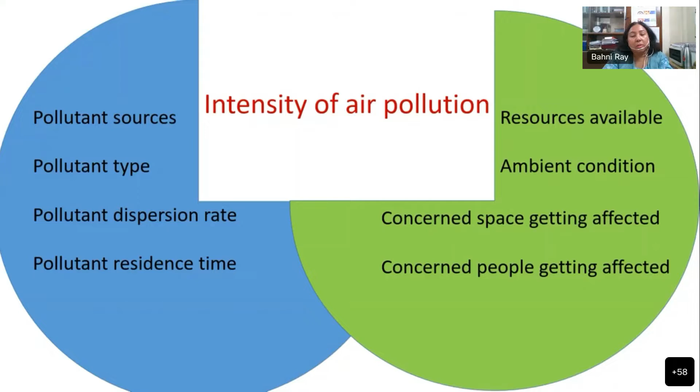If we look at the second circle, that's how we are tackling it. It could be the available resources, which I will show you today as a list. What is the ambient condition? Here atmospheric parameters come into picture—temperature, humidity, wind condition, location—all those things matter for that particular resource. What is the concerned space getting affected—is it a school area, inside a room, an office, or an open traffic space? And who are the concerned people? All these factors are noted when thinking about the mitigation technique.

Quickly I will go on to the sources, or again the enemies we are tackling. First we look into the gases. Most of them mainly consist of carbon monoxide or carbon dioxide, where the maximum part is from transportation or combustion of fuels. Then there are other factors like manufacturing, which I will not go into in detail in these slides.

Then there is NOx, where again the main contribution is from transportation. We have SO2, which comes from transportation as well as electricity and heat production. And we have volatile organic compounds, a combination of transportation, residential input, and oil and natural gas. So indoors, for example, we have a lot of sources where we get VOC as a pollutant.

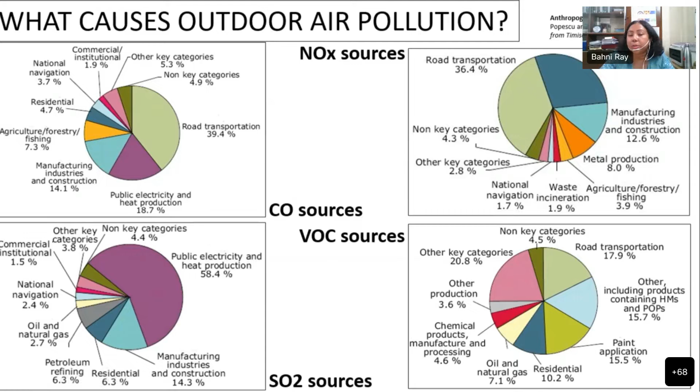And there is a new enemy now for us, which is HFC, the hydrofluorocarbons. This is the worst enemy, because it comes from refrigeration or air conditioning, without which we cannot live nowadays—so we cannot avoid having this. It accounts for about 47% of the entire chart.

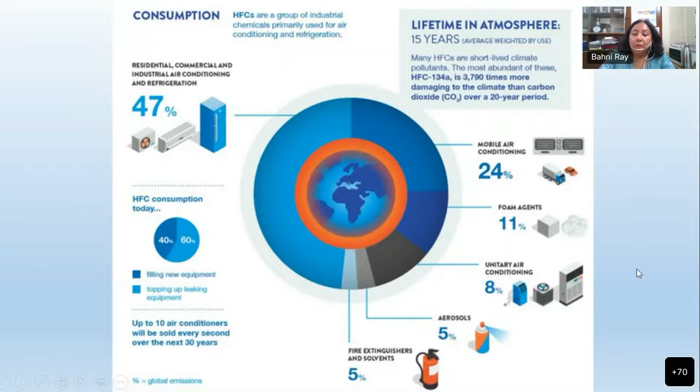Apart from this, we have particles, which we call PMs in short form. We may have seen this kind of chart before. Why did I keep it again here? It's because if you look into the sources, the green ones are from nature, which we cannot avoid, and the red are man-made. That's something to think of, that we are making the pollutants and now deciding how to remove them. That's a real concern for all researchers nowadays.

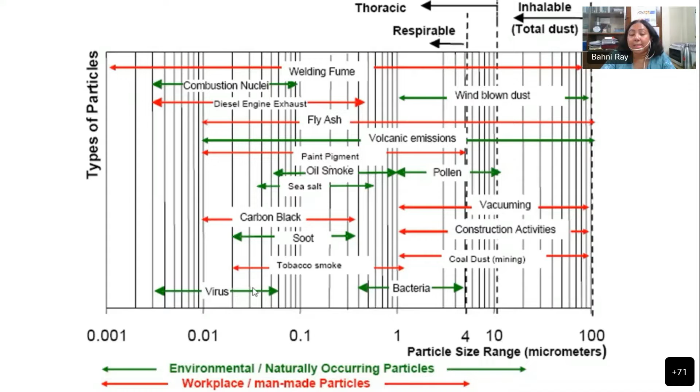When we talk about PM10, it actually consists of particles coming from fly ash, smoke, diesel engine exhaust, bacteria, virus, all those ranges.

Regarding the size, most papers compare it with human hair, which is about 50 to 70 microns, and we say we are looking into much, much less sizes, like PM10, which is around 7 times less than this, PM2.5 and PM0.1. PM0.1 is in the range of ultra-fine particles. They're called coarse, fine, and ultra-fine, depending on size.

I kept this spider silk or spider web here, which we could also see through our naked eyes. It's about 2.5 to 4 microns. That's the range we're looking into for fine particles, and lesser than that are the ultra-fine particles. So this is where we are getting this from.

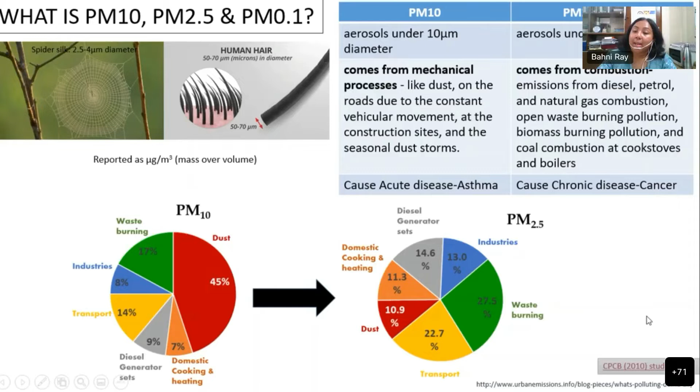PM10, the larger one, is mainly from dust, and some ranges are from waste burning or industries, and PM2.5 is mainly a byproduct of combustion. So that's the scenario, and those are the enemies we looked into.

And again, what are the chemical properties of those? When we think of a device to mitigate that, you should know the chemical property, so that chemically also you could tackle them. We know the size, that is the physical property. We should know the chemical property as well.

If you see some names, I will not read them all out, but it could be potassium, calcium, zinc. There is a range of elements which could be present in the particles.

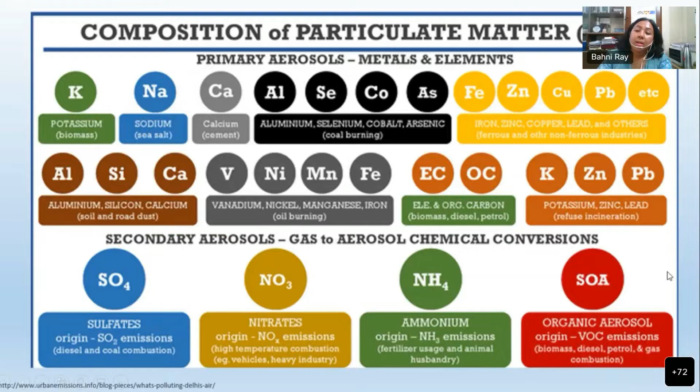Indoor pollution again has a similar condition, which we mostly do not talk about much, because when we say outdoor pollution, that looks more severe, and we feel we should do something about so much pollution outside in Delhi, mainly in the winter. But indoor pollution is equally bad, or you could say sometimes worse than the outdoor condition.

There are airborne particles like smoke, fiber, hair, pollen. There could be volatile compounds, which is the maximum in indoor cases, mainly due to paints, furniture, and office equipment. There could be odors and those kinds of things as well. And then there is microbes.

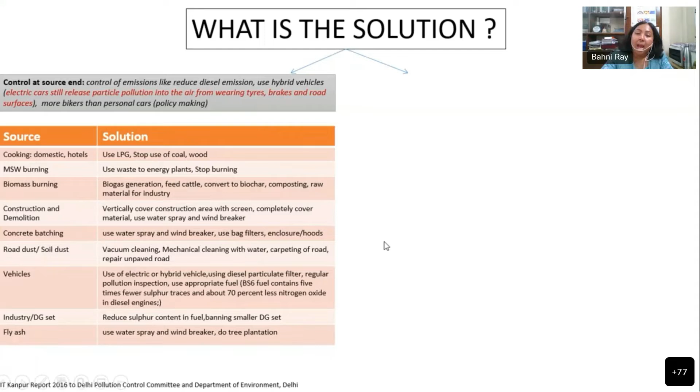And then there is another set of solutions, which is making some device or using some device. So either you develop a new intervention, and when you develop that, you have to assess its cost, or you have to assess how it is effective in that particular situation, and then design a program to optimally deploy that set, again in a cost-effective manner. So that's the two ways which we could go.

So the left portion, that is the control at the source end, is one. The right portion is the one which I will talk about today. Control at the source end is something which is again a different zone, which I will not talk about in this presentation.

Okay, so I will move on a little faster now. So this is the entire introduction, and now I'm going towards the different ways through which we could do this.

So in the outdoor case, another factor which comes into picture is induced air flow. It means if there is wind blowing, and if the flow of the spray itself is so much that it is removing the particles from that zone instead of capturing them, then that is a disadvantage. So those things should be taken care of - are we inducing some air flow on the medium.

So then there are different ways by which this capture happens, and I kept this because some of this is the work which we are doing in our lab. So if you have very small particles, it will have Brownian motion - very small, like it could be nano size. It will just move randomly and go towards the droplet.

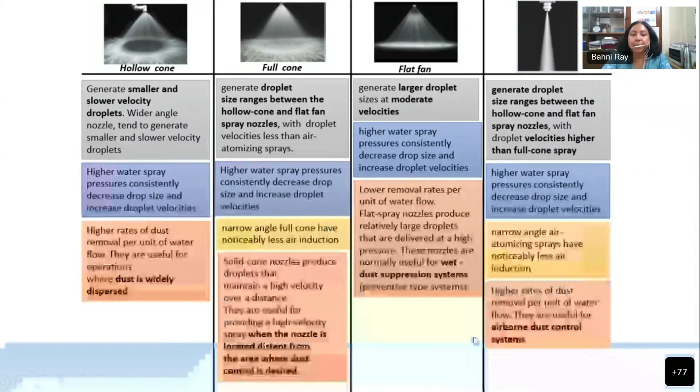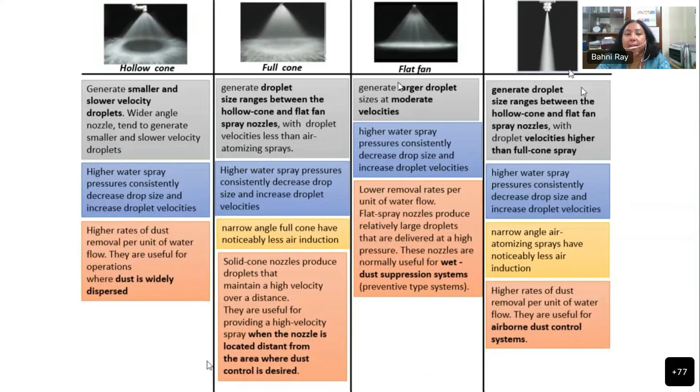Okay, so now the different types of sprays which exist are like the hollow cone - if you see the image itself, it's hollow - the full cone, and the flat fan. Depending on the type of spray, one could be used for a widely dispersed system, or used for airborne dust control.

The second kind of categorization is that the air is taken on through a pipe and then passed through a tank of water. It means that the air or the air bubble carries particles, removes the particle into the water, and then clean air goes out. So that's the aeration process.

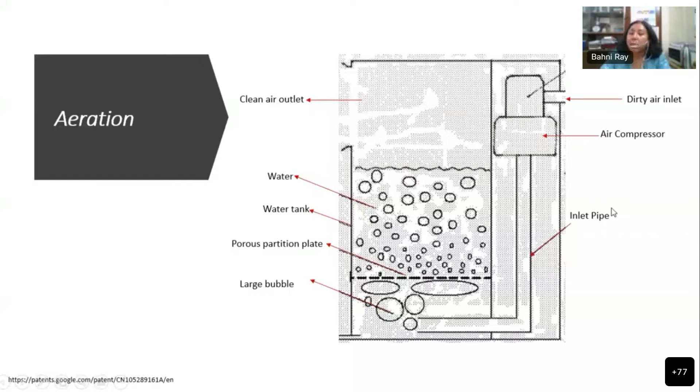And through this - this is one of the pictures I've taken from a patent - this is the way some people do it. We can devise the method of mitigation, again depending on the sieve size, the height of the liquid column, the type of flow, how much the air compression power should be - everything are factors to be noted here.

And the most common is the air filter or the fabric bag.

Pressure drop is very important to note here, because as more particles get captured, a filter cake forms on the surface, becoming a thick layer of that particle. Then the pressure drop increases and you need more power to run it. So you have to clean it regularly or change it to keep the mitigation going.

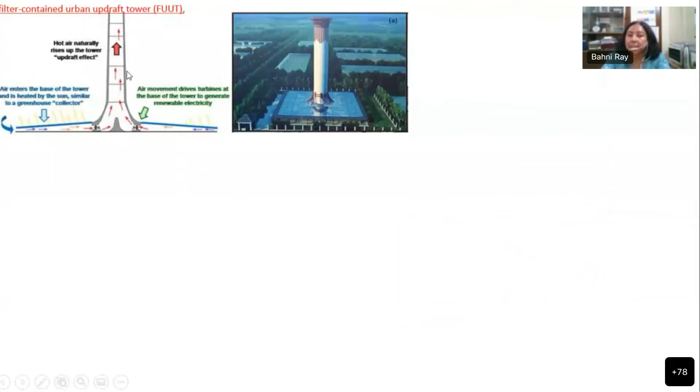Here are some pictures for large scale outdoor pollution cases. This is what was built in China, where there were a range of multiple filters in a tower, and air was sucked in from below and moved through the filter layers, with clean air going out at the top. This is the smog tower in Delhi, which could clean about 1000 cubic meters of air within a 1 kilometer radius per second.

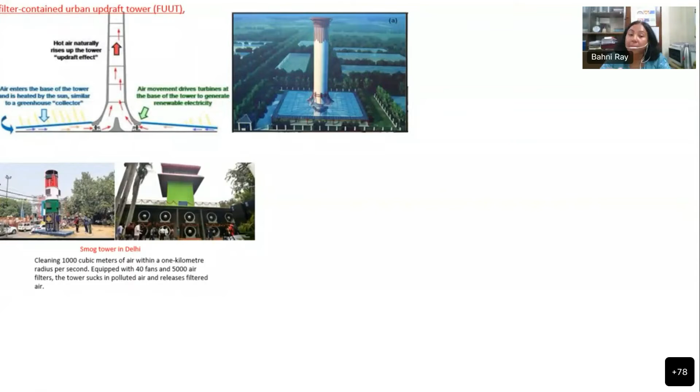It is equipped with 40 fans and 5000 air filters. You could see how much power is needed here and how many filters we have used. And then we have a Vayu unit in Delhi as well, which is also a filter-based method.

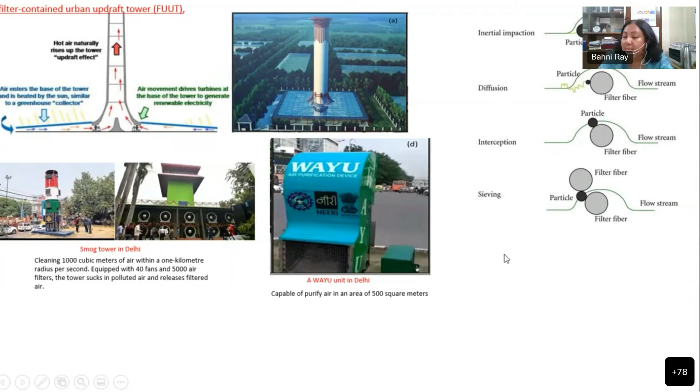Similar to droplet and particle interaction, the method is quite similar here: if it is a bigger particle, it directly impacts the filter. If it is a smaller particle, it undergoes Brownian diffusion and reaches the filter by random motion. One good thing about this filter technique is you could also tackle gases or particles at high temperature.

Then we have the HEPA filter, the main filter used in most air filtration systems, which takes care of micron-sized particles. Here, the new thing is the titanium oxide filter, which neutralizes certain molecules and combines with UV. There is an extra UV ray as well, which takes care of bacteria and viruses. And then in the last stage, they have negative ions, which clean dust and contaminants. So they have 5 to 6 stages of purification in this air purifier.

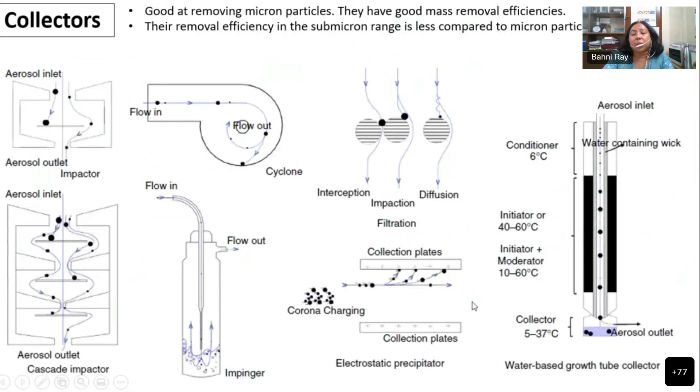A lot of work has been done in air purification, and the disadvantage is that you have to clean or change these filters regularly when they get clogged. The range of other methods by which you could mitigate come under collectors, so I will go directly to them.

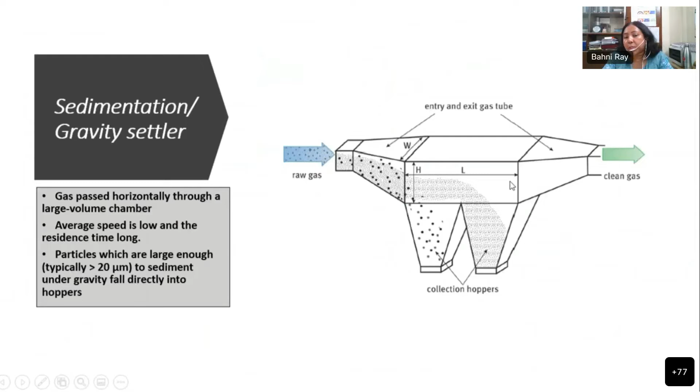This is again used in industry for larger particles, greater than 20 micrometers. Due to gravity, as the air passes through, the weight of the particle causes it to fall down through the hoppers, and clean air comes out.

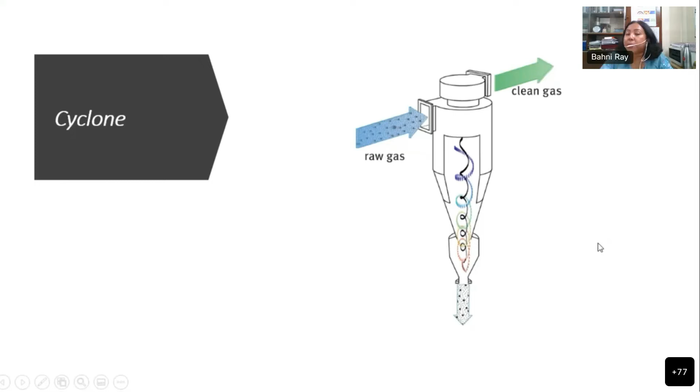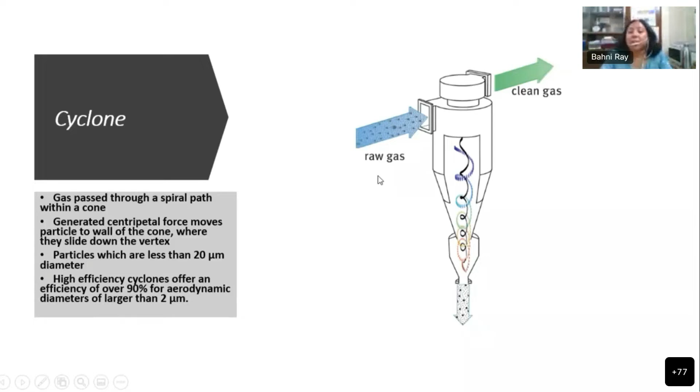Then we have the cyclone, which is very much used nowadays. Here, it's not only due to weight -- there's a centripetal force as well, because it's cone shaped, and the particle or air moves in a spiral motion, allowing us to capture particles less than 20 micrometers as well. These are called cyclone separators, the cyclone way of cleaning air.

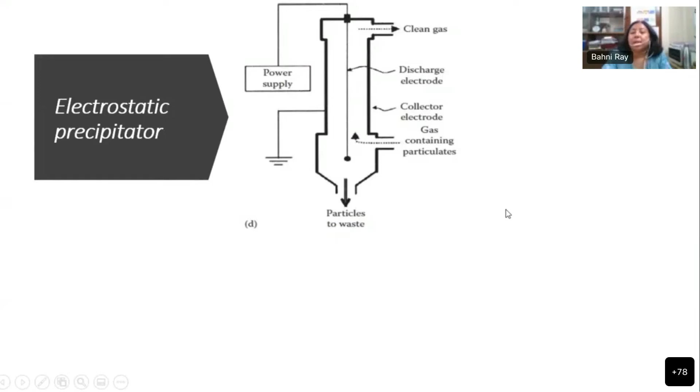The most common is the electrostatic precipitator, which most of you have heard of, where you use electrodes to capture the particle. You put gas inside, the particle gets charged with an opposite charge, and it gets attracted towards the electrode, which is the collector electrode. Ultrafine particles could be captured through this.

There are two kinds of ESP nowadays, dry and wet, because you need to clean the electrode that collected the particles. First you collect, and in the next stage you have to think of how to remove those particles, otherwise the instrument won't be usable for long. So either for dry ESP you rap it with a hammer-like mechanism already built into the ESP, or you clean it with water, which is a wet ESP. Both exist in industry today.

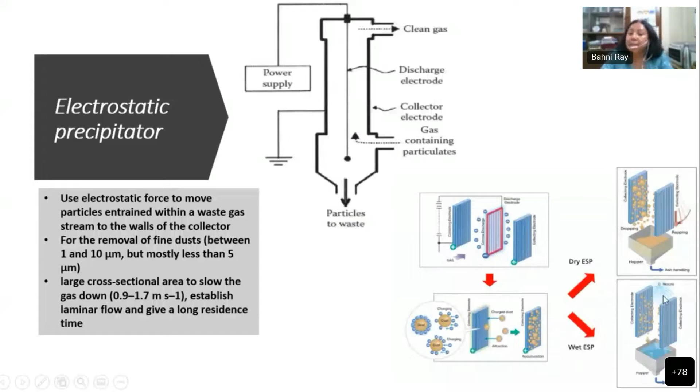Now we are looking into the gas. So from particles, we are slowly moving towards the gas pollutants now. So if you look into the wet gas scrubber, or sometimes called gas absorber.

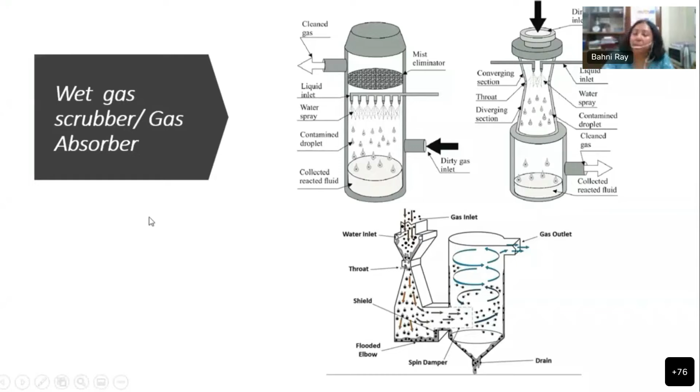The next category for gases is adsorption. So I talked about absorption and now it is adsorption. These are two different terms used here, which in chemical engineering they know a lot about. As a mechanical engineer myself, I had to learn the difference a little bit. And now we are working on this adsorption phenomenon as well in our group, just started it.

So what exactly is it - if you have an adsorber bed, it could be a porous structure, a collection of small granules, which adsorb the gas either physically or chemically. It could have one layer of adsorption, like chemisorption, or it could have multi-layer adsorption. So it is an external kind of phenomenon. In case of absorption, it is a phenomenon where you completely dissolve the thing. So that's the basic difference.

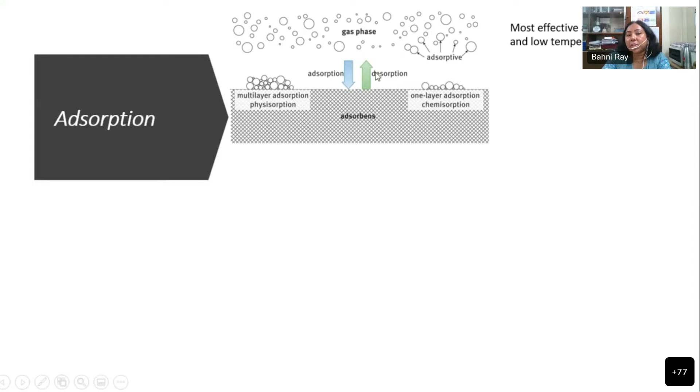It is most effective at high concentration of the gas and at low temperature. This is a typical kind of geometry showing how it works - there's the adsorber bed, and the most common kinds of adsorbents we see are activated carbon, silica gel, polymer-based materials, and zeolite. Those are again quite costly and not very abundant in nature. So that's part of the research which goes on in adsorption - what kind of material could be suitable for doing this kind of adsorption phenomenon.

Then the next category is condenser. This part is more like what mechanical people do when we teach heat transfer, heat and mass transfer. So we talk about condensation - it means you have some hot gas and you condense it into liquid. So the same technique is used here.

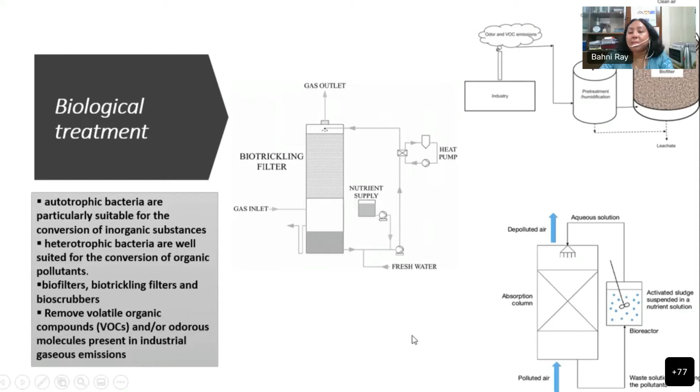And there could be biotrickling, where you have water trickling through that filter, or it could be something where you have a bioreactor. So there are three categories, and it mostly tackles VOCs or odorous molecules in the gases. So it cannot tackle all kinds of gas. That's a shortcoming, it could mainly tackle gases which have odors or the presence of VOCs. But again, it could go a long way, I think.

And this is a very interesting way, like that was where the bacteria was. So if I go to the previous slide, what actually is happening biologically here is, when I'm saying you have some materials like wood dust or something, in that the bacteria are growing and that actually takes in the gases, eating the poisonous gases.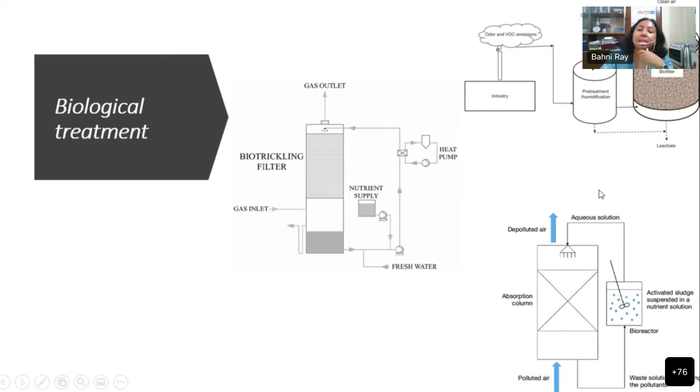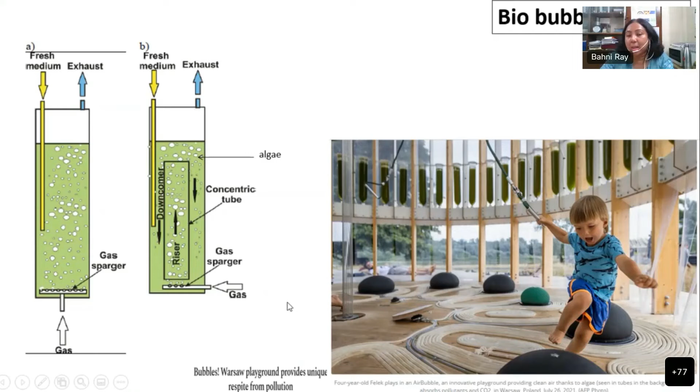In a similar way, the bubble thing which I showed in the last few slides - in Warsaw they did this, and in London also they built something like this, some park, where they have tubes full of algae. The small bubbles or round shapes you're seeing are like some pump, where a kid or somebody could just stand in that and air will push on, similar to this link, where the air is getting pushed through these multiple tubes full with algae. The bubbles get cleaned by the algae, and then clean air comes out. So that's another way of biological treatment on impure gas, which again is not done in large scale, only small scale, which is being used nowadays.

This technique is again another technique where we are using something from nature, that is plants. This is something close to my heart, because it's natural - we do not need to depend on something else, but you need to know about the plant structure, the type of plants, the type of their leaves, their stems, and how capable they are. If you look indoors nowadays in big buildings, you will see in corporate buildings this kind of thing.

They're now used outside too. On roads also we see some walls covered with this kind of plants. I don't know about outdoor, but indoor it's very essential and very important how it works and how it cleans the air. Then I'm talking about the urban tree, which is again an important factor that environmental or civil engineers work on, mainly for outdoor.

So I'm giving one example here. If you look into the bottom picture, there are three houses of the same height with car parkings. Some pollutant has been created here due to some reason, but it cannot circulate because the movement of air is just above it and there is no way of circulation inside. Now if you look at the top figure, where one building is high, another is lower, and you have trees in between, that helps in the circulation.

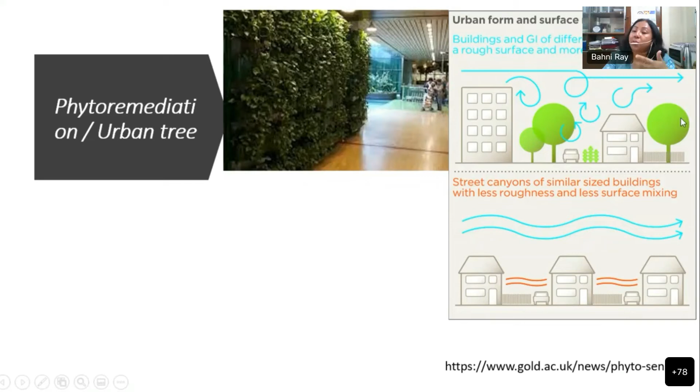So whatever air is coming in, it circulates inside, takes in the dirty air, puts in clean air, and helps in mixing the air and cleaning it. So that comes into city planning, where trees are helpful, and the way you are building the city is helpful.

And this could tackle - though we think these are just plants, how much could they do - but they could tackle particulate matter, volatile compounds, inorganic compounds, POPs, heavy metals, and all those kinds of harmful particles, which could be used in indoor pollution remedying.

These pictures I just took are from one of the papers from 2019, and this work, phytoremediation, this topic is not that old. It may be around 10 years old, since which people are working a lot on this. The first time it was said by NASA that plants could reduce pollution, but there was not much work done on it then. But in the last 10 to 20 years, a lot of work has been done. This is one of the papers where they devised such a thing.

And in India, we have a startup company, Ubreathe Life, which built a device like this, where they say the roots are helping in the cleaning, but they also have a HEPA filter layer. So they're doing double cleaning in this, and they're taking care of different kinds of trees - for example, the peace lily, there could be dragon plants, so all kinds of indoor plants.

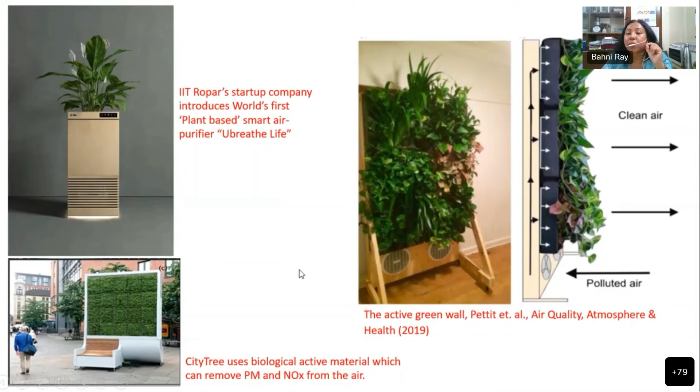What if you like indoor plants, you may know some names - those kind of plants could be used. Not only roots, but the leaves, the twigs, wherever there is some hairy structure, they help in collection of particles and all those ingredients.

And this is the last technique which, while preparing the slides, I just got - it's a very interesting technique which is being used.

Here, it's called the photocatalytic or smog-eating pavement and building. So it means we are mixing titanium oxide, TiO2, with the cement, and that helps to capture the NOx in the atmosphere in presence of sunlight, so there will be photocatalytic reaction. Sunlight or the temperature should be sufficient so that the NOx could be captured. And when you pour water on it, or if it rains, it converts this NOx to NO3, which could be removed. This entire thing has been implemented in some countries as a test case.

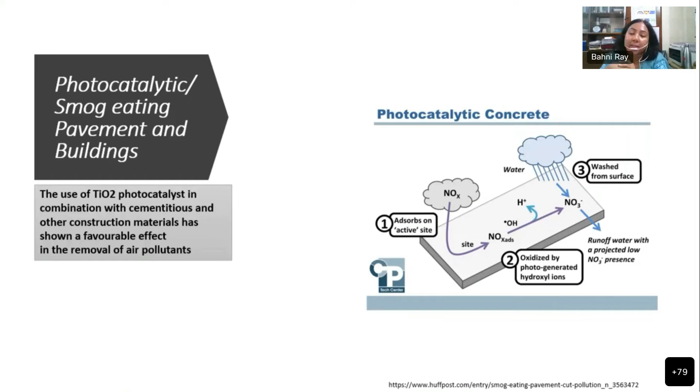Again, it's not a fully fledged mitigation technique, it has been used as a test case, and they saw at least 50 to 60% of NOx could be reduced on the road. Even if you use it on buildings, it will be multiplied by that. So this is one of the great techniques which civil engineers have devised.

Okay, so I will not go through these slides, it will be quite boring. So we looked into different categories like collection of particles, converting particles or gases to something usable, using natural means, using chemical ways, and then using different kinds of fields like electric field. There are UV as well, as I said, we are using ultraviolet rays nowadays. So all the categories have both advantage and disadvantage - this again is a big list. As you know, whenever we see some problem, we have to devise some route to solve it. Obviously there will be both advantages and disadvantages, but we have to weigh what is more important to us. But we have a list now and we could work on it.

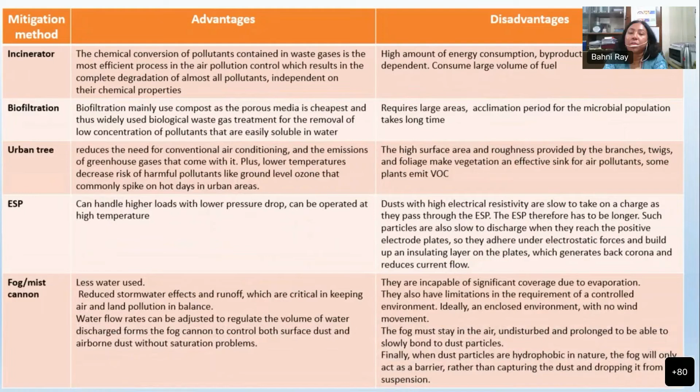And now I will gradually end this talk. I think I have finished my time as well. I will give a food for thought.

Now say you have a confined chamber and an unconfined space like outdoor. For a confined chamber, if you have a spray nozzle which removes dust per unit of water, it directly increases with nozzle operating pressure. So if you keep increasing the pressure, the dust removal rate will increase for the confined chamber, because as you increase the pressure, the droplet size decreases and it becomes more applicable to capture small particles. For unconfined space, as the number of spray nozzles and water pressure increases, the dust capture effectiveness per gallon of water is reduced due to dilution from spray-induced airflow.

So that's the thing which I said - it should be taken care whether you are capturing or pushing away the air close to you, because you're putting the force so high that you're actually pushing the air away from you. That's the problem in case of unconfined space. And the second thing is the residence time.

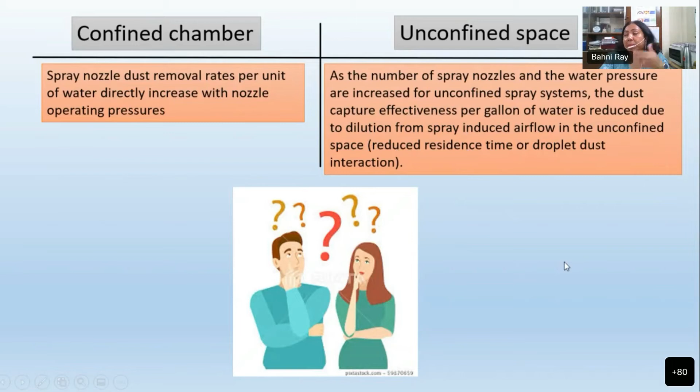So why I kept this as a food for thought is this: on Sunday, like all of you, I was watching on TV the Noida Twin Tower demolition. And when I saw this, the first thing that came to my mind was what is going to be the pollution. That's the first thing which came to my mind, because the rest of the things obviously they have taken care of, but pollution is something which is the aftermath - it will continue for months.

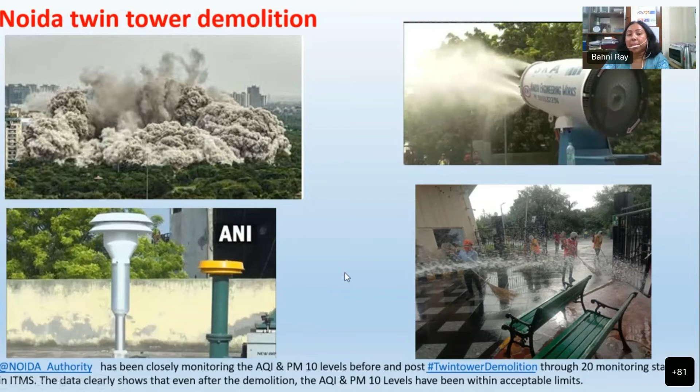So now if you look into some property of the particles, how the residence time changes - if you look into SO2, NO2, ammonia, PM10, they remain for hours in the atmosphere and then settle down. That's what they had captured within that time. And if you look into the next zone, like CO2, CH4, SF6, all these ranges, and then PM2.5, they remain for days, weeks, and can stay for long and long. So that's the thing we need to think more about - are we tackling only for some particular time, or could our device tackle for more time and be more efficient.

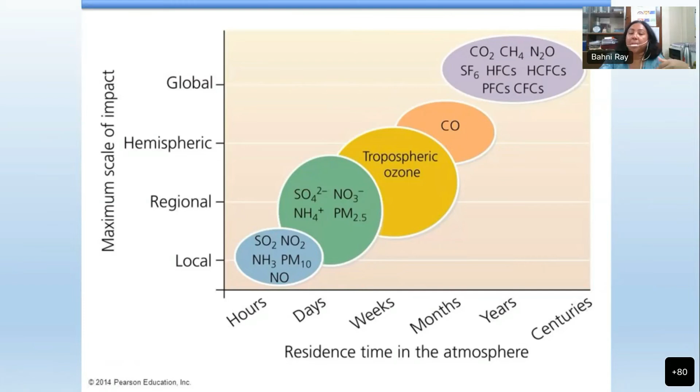So devices should be thought of differently for outside, and for indoor devices will be different, and that is what we should think about. I already gave you a list of the devices which are existing. You could combine them, look into the advantages and disadvantages of each, and think of what could be the best.

So I will end this. Thank you for your attention, and I will take up the questions. Thank you.

Thank you, Professor Ray, for the very insightful presentation and sharing your research experience. Now moving to our Q&A session. Our first question is from Dr. Mohit Kumar. The question says, are there any studies to evaluate the impact of smoke towers in reducing air pollution in Delhi?

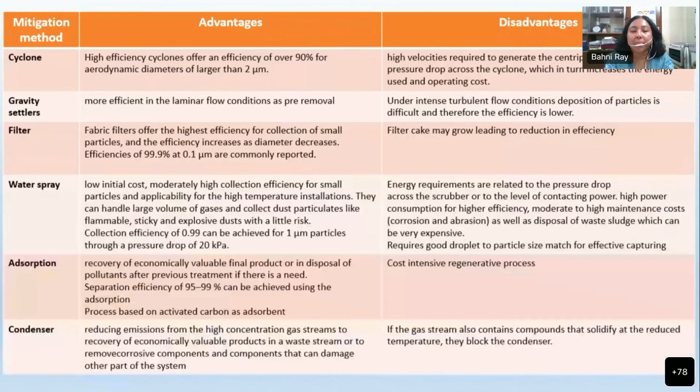Yes, reducing pollution by smoke towers, as I showed in the slides, we have smoke towers in Delhi. Two kinds till now, and multiple of them are being put now in different places, like Connaught Place. It started, I think, three years back. Let me go to that slide and show that picture.

And then there is this WAYU, which takes care of about 500 square meters. They're trying to make it much bigger now, increasing the size so that more air could be taken in. Again, you cannot do anything with a single smoke tower, a single WAYU, at a particular place. You have to have multiple of them.

And again, the question I raised earlier, when you devise a plan, you should think about where you are deploying it. You have to make an entire program of deployment, considering how much area it is covering and up to what range, and only then could you see the beneficiary of this. Otherwise, you cannot actually feel that something is happening.

Our next question is from Keyusha. The question says, what is the economics cost of outdoor air scrubbing using smoke towers or other solutions?

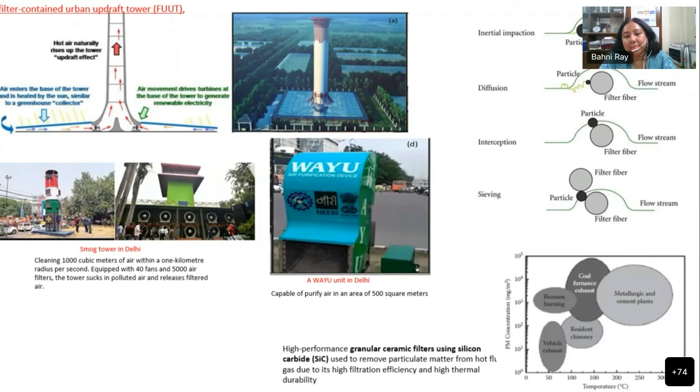Okay ma'am, our next question is from Deepak Kumar. His question says, if I understand correctly, you have mentioned that dust particles are charged. Can you elaborate a little more on this? For example, is the charge preferentially of one sign?

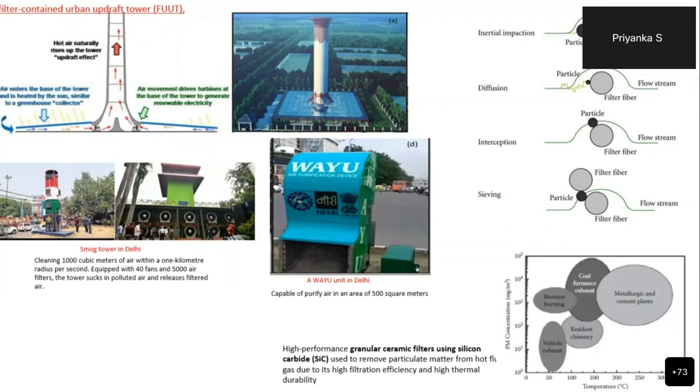Okay, yeah, very good question. So yes, we are working on this, and it's interesting that particles - let me go to that slide. So particles by themselves have some charge. That's by nature, you cannot have completely neutral particles. They carry some charge, that has been seen. And it could be either charge, positive or negative.

But whatever may be the charge, whenever you are using a spray, it is in your hand what kind of droplet you are giving out - are you giving a positive charge droplet or a negative charge droplet? So when the particle comes close to that, it will induce - that mechanism is again quite complex, how that induction happens - it could induce the charge to that particle and attract it. There are multiple physics involved in this. But yes, both charges exist in particles, not a single one. It could have any kind of charge.

Okay ma'am, our next question is from Ravi Kaushik. His question says, won't electrospraying increase humidity? Because an increase in humidity will require more energy to be cooled.

Okay, so when you are saying increasing humidity, it's not about this electrospray specifically. Any kind of spray, any kind of mist cannon, whatever we say, increases humidity, true. And increasing humidity may not be a major factor compared to the pollutant capturing. So that's the thought which scientists put on when they used water as a tool.

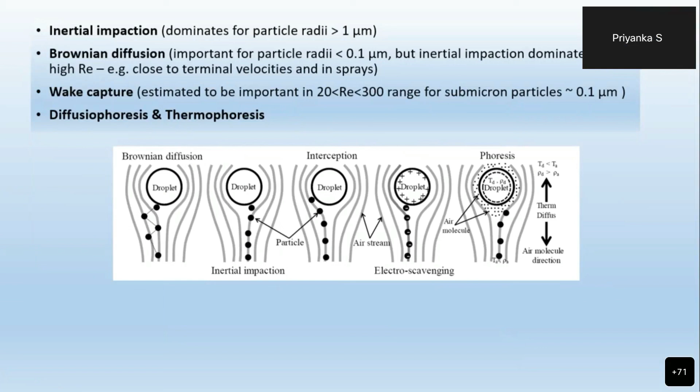Yes, studies are quite less on indoor pollution itself. That's the main thing. When we look into indoor pollution, we know there are all these compounds, and the main remedy most of the time we talk about is filters, air filters, or air purifiers. But again, yes, ozone and PM have equal kind of impact.

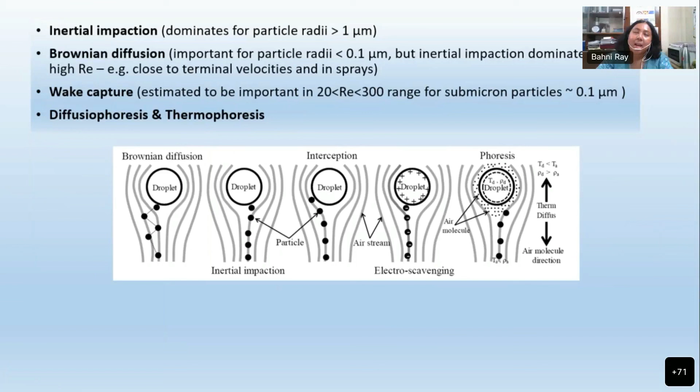If I just show you that particular slide where we've shown the different kinds of products coming out in households - ozone actually happens at higher temperature when VOC connects with NOx. That's how ozone comes in outdoor pollution. But in indoor pollution, ozone is not much talked about. It's VOC which is much talked about, and asbestos, lead - these are talked about. This could be another factor to be looked into, but not much study has been done on it.

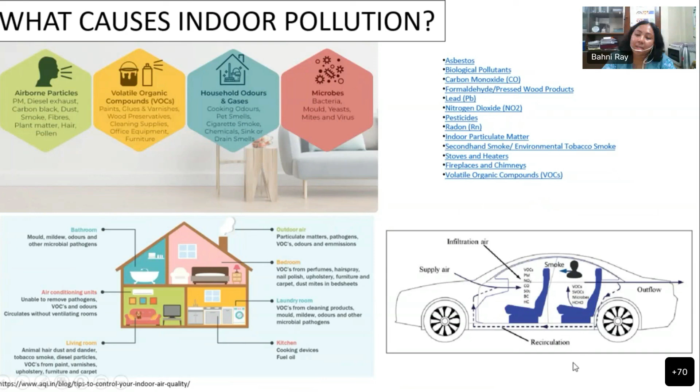Next question is, which control technology do you think is more satisfactory for outdoor air pollution?

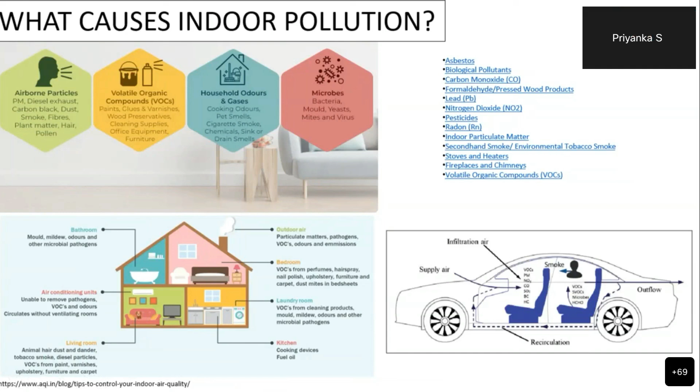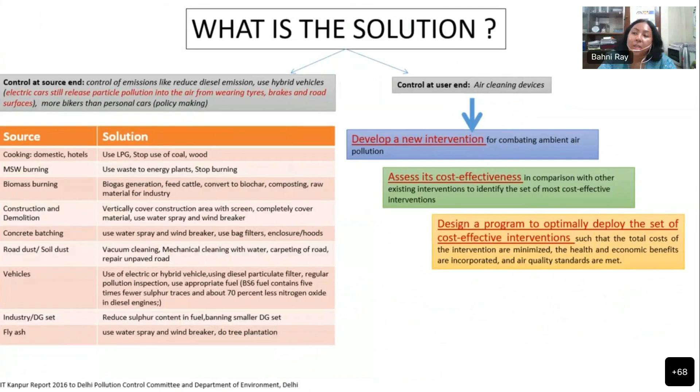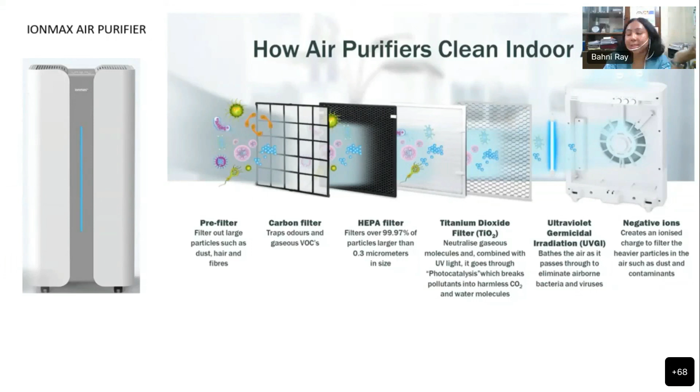It's a very tricky question and nobody knows which is the best. As I said, there's a list of interventions already there. The best way could be, which is close to my heart, phytoremediation - the way plantation and those things are working - because in that you have multiple advantages. But for a large tree to grow, it takes a long time. Filters have their own advantages and disadvantages. Sprays have their own advantages and disadvantages. So there is not a single answer to this question - I do not have a single answer to outdoor pollution.

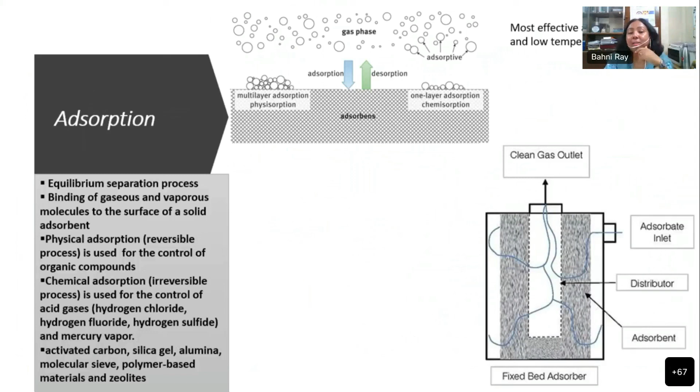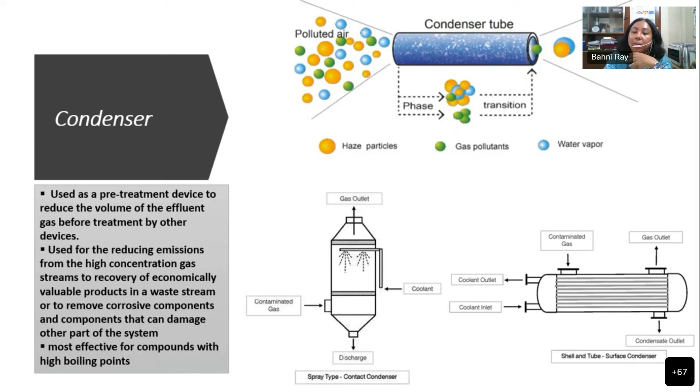But what I'll suggest is that rather than just outdoor - yes, outdoor pollution should be tackled - but along with outdoor, indoor pollution, where you're staying most of your time, you should take care of that as well. Because different kinds of diseases happening nowadays are not because we're staying a lot outside, but because we're staying a lot of time inside. So that's what could be tackled, and devices could be made for that. Lots of devices exist, like the air bubble technique, micro bubble technique - all those techniques already there could be used for indoor.

For outdoor, the factor of scalability comes into picture - whether that could be done at scale, and how much area it could cover. Those are really very vast calculations which need a lot of minds to work on. But if you have a small room, you know the area of your room, you could devise an indoor solution quite faster. For outdoor, the answer is again not sure.

This is the last question. Does the use of air filters effectively reduce the chemical composition, like carcinogenic metals, ions, etc., besides reducing particle concentration levels? Are there studies related to that?

Filters mainly take care of particles - those are mainly existing. But filters are nothing but porous structures. For carcinogenic materials or gases, there are existing filters, and people are working on that as well. It's still a working area, but yes, there are existing filters for that. As I'm saying, it's not the HEPA filter - it may be some other kind of filter. HEPA filter is mainly for ultrafine particles. So filters, being porous structures, there are other kinds of porous structures which could take care of those gases or particles.